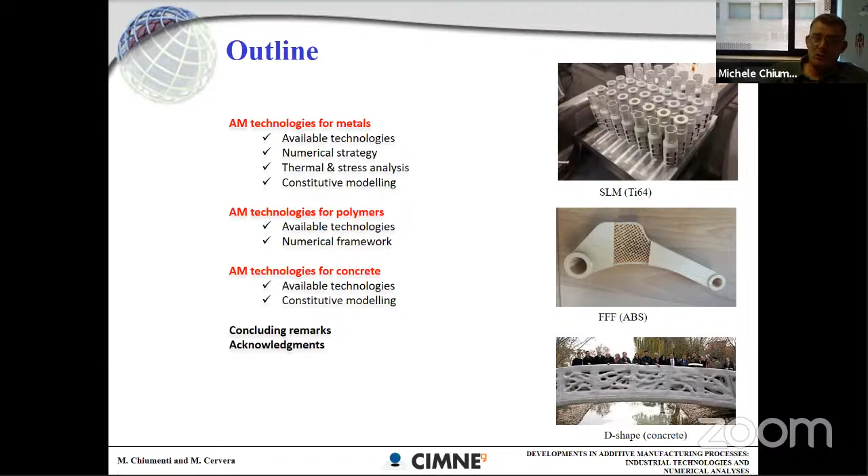I will show you the similarity of this technology in these three different fields. Even if the materials are obviously completely different, the industrial technology resembles somehow, and this is why we can use the same platform for the three of them, but there are some differences that I will show you. So I will start with metallic alloy, then I will show you our work referring to polymers, in particular ABS, and finally what we are starting to do on concrete additive manufacturing.

So the first idea, which I think is extremely important to understand, is that we are working on numerical methods, and numerical methods have some kind of limitation, and this limitation reflects the actual technology in additive manufacturing.

In additive manufacturing, if we refer to metals, there are three driving technologies. The first one is wire feeding, which typically works with very slow scanning speed, millimeters per second, and large thickness of each layer, let's say more than 1 millimeter. Right now we are working with an aluminum component, and the thickness of layer is up to 4 millimeters. So quite large thickness and very slow deposition, with a lot of power needed for this kind of technology, meaning very much coupled thermomechanical coupling.

In the middle, you can find blown powder processes. In this case, you have a heat source through laser or electron beam, and the melt pool formed by this power source is filled by powder, which is blown inside the melt pool. In this case, we are talking about layer thickness of about 200 to 300 microns, so one order of magnitude less than the wire, and the speed is ranging around 10 millimeters.

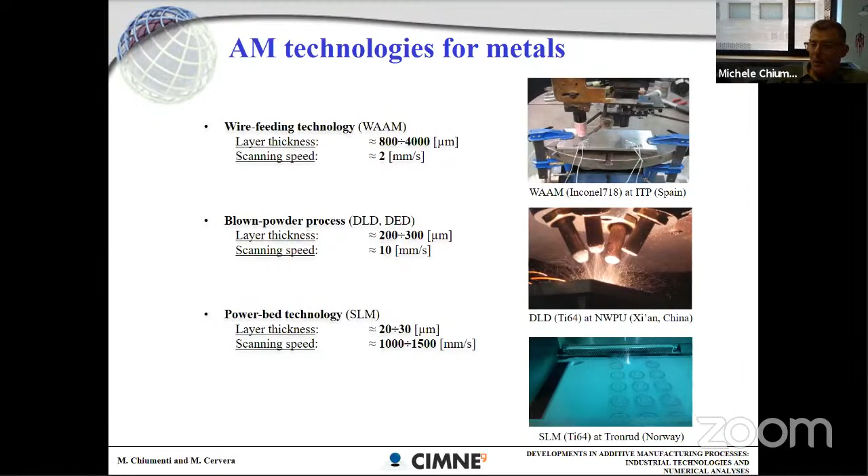Thermomechanical framework. So the thickness is completely different, it's much more localized, the power is much less, and the penetration is much less. And another important thing is that in a powder bed, you have a recoating time, which uncouples more and more the simulation.

So given this, in our opinion, the best and probably most reasonable and suitable numerical strategy for additive manufacturing is when you are able to perform a highly accurate solution of both the temperature and the stress field. This means that you want to reproduce exactly, or as exactly as possible, the actual industrial process. So you want to move the heat source, follow exactly the same scanning sequence, and wait for the same delay time as in the actual process. At the end of the day, you end up with a fully coupled thermomechanical simulation, and I will show you the numerical solution for that.

On the other extreme, you have powder bed. In powder bed, nowadays it is almost impossible to think about high fidelity simulation, meaning it is extremely difficult to follow the exact scanning sequence of the machine, because the size of the layer, the thickness of the layer, and even the size of the melt pool is completely different, two orders of magnitude compared to wire feeding. At the end of the day, the simulation time would be impossible to manage.

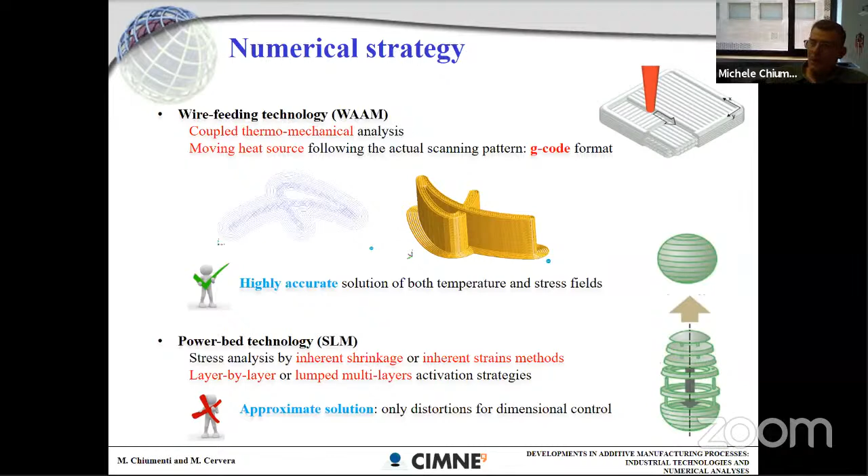So why high fidelity? We think that high fidelity is extremely necessary because if you don't have a solution in high fidelity, at the end of the day you are just generating cartoons. Beautiful colors, wonderful for publication, but much less interesting from the industrial point of view.

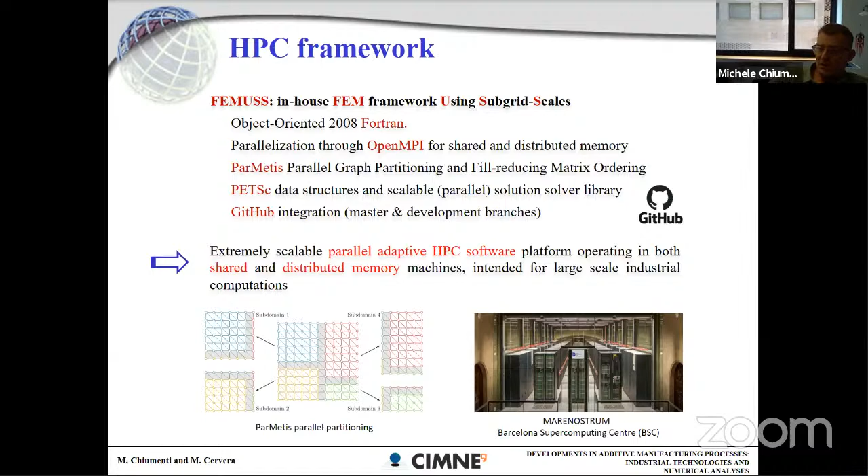We are using ParMetis for the graph partitioning, meaning for the subdomain division. We are using PETSc as a solver library, and we have GitHub integration to allow the work of a larger team compared to what we had in Comet. So this is a very powerful platform, and we are actually running in very large machines. For instance, here in Barcelona, we have the BSC supercomputing center, where we can run the simulation on thousands of processors, typically a large machine in distributed memory.

Next, typically, as for many other industrial processes, the geometry is the bottleneck, and the meshing of this geometry is a nightmare. Apart from this, if you want to go into a high fidelity mode, you really need to follow exactly the scanning sequence, and this also means that you want to mesh according to the scanning sequence. So you want the definition of the mesh according to what the machine is doing, with your melt pool moving along the scanning sequence.

So to do this, what we did is integrate our solver to be able to read the same input data as the machine does. And this means our solver is able to read G-code. This G-code, for instance, can be generated through Cura, which is an open source tool able to generate G-code.

Typically, the machine adds to the original G-code, which is just a geometrical representation of the hatching, as you can see here in the lower part of this file I put as an example. But in this file, you also have added information according to the processing parameters of the machine. For instance, you have information about the power source, the feeding rate, the hatching, and the cooling time. So everything is inside this file.

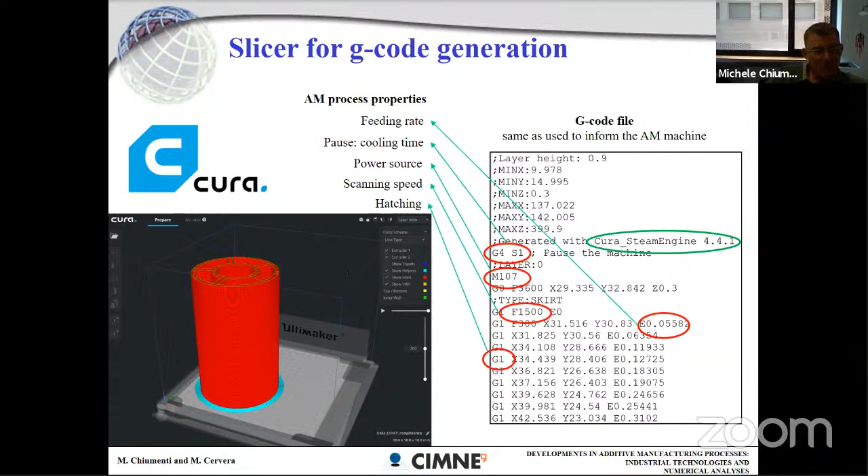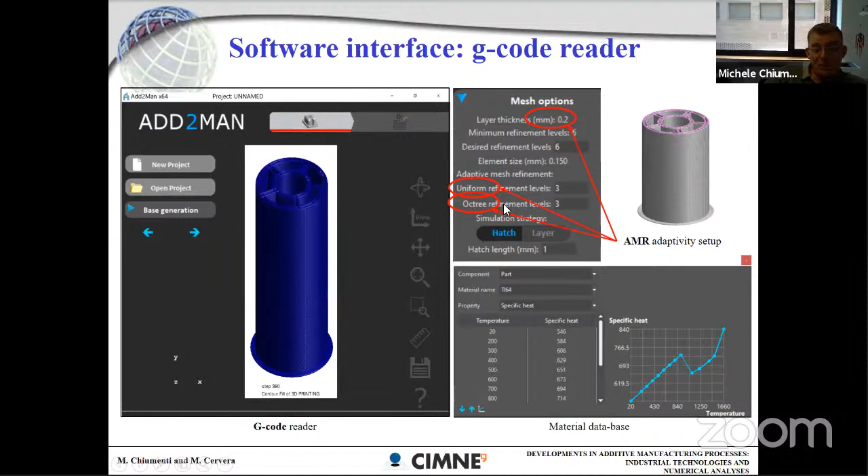And it is the same file which is used to inform the machine, exactly the same. So this means that in our interface right now, we are able to import the G-code file as a representation of the scanning sequence. So you do not generate any mesh—the user is not asked to generate any mesh. The only thing the user does is modify or define the corresponding material database, typically temperature-dependent, and define the number of uniform refinement levels and octree refinement levels to approximate this geometry. And I will show you right now.

We do not have any mesh at the beginning of the process. We just have the part represented through lines coming from the G-code. So the first step is to define the so-called bounding box—you just have one finite element, which is the bounding box of the component. Next step is to define a number; typically we are using about 3 uniform refinements, and this generates a uniform Cartesian mesh of the component.

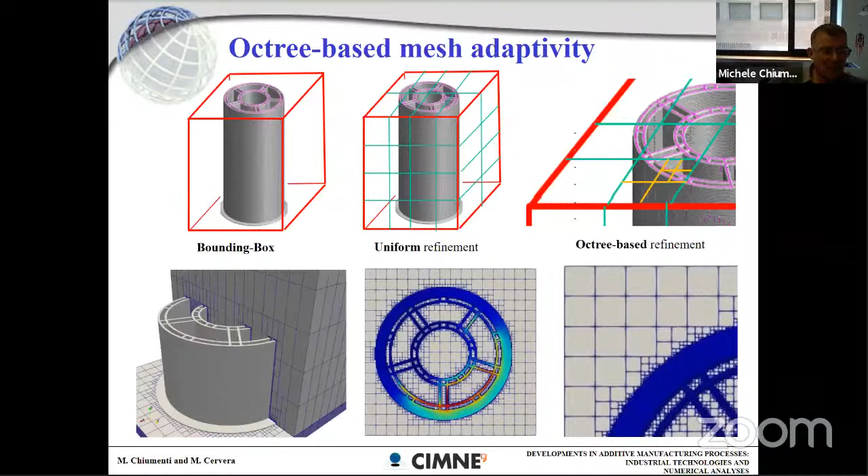Next, there is a following step in which you have the so-called octree-based refinement. The octree refinement just splits one element into 8 elements, in different steps. So at the end of the day, in the lower row here, you can see how you have a very large element where the mesh is not needed, and a very fine mesh where you really need to represent your component, exactly following the scanning sequence of the machine. Obviously, all the elements outside the zone where there is no material are not used, are not assembled, are not computed—nothing. They are just there but completely out of the solution scheme.

Next, reading the G-code, we are able to define a bounding box for each part of the hatch defining the G-code. This is typically a bounding box like this, which takes into account the layer thickness and the width of the spot size, and we intersect this volume with the surrounding mesh. This process is done in parallel, so each processor performs exactly the same operation, defining which elements are to be activated.

And if the background mesh is too large to represent this bounding box, the mesh can be further refined until we are sure we have a good representation of the mesh for this kind of bounding box. So here in the second row, you can see how the mesh is generated and how the adaptive mesh refinement takes place. In particular, you have refinement in the heat affected zone, and then a coarsening operation elsewhere.

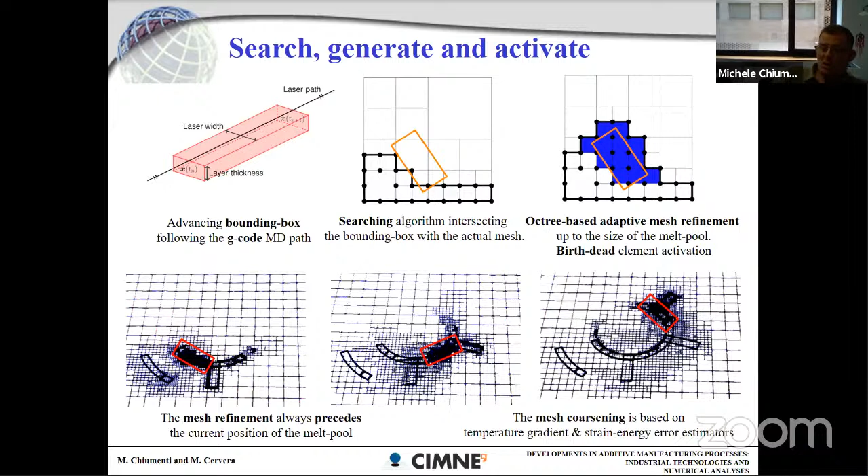So at the end of the day, this is the kind of simulation that we can do. As you can see, you have a mesh which is progressively built according to the scanning sequence, and at the same time you have the solution of the problem. Here I'm just representing the active elements—all the other elements are not active, not computed, and not visualized in this process. For the part that I showed you just before, we are using 4 levels of uniform refinement and 4 levels of octree refinement.

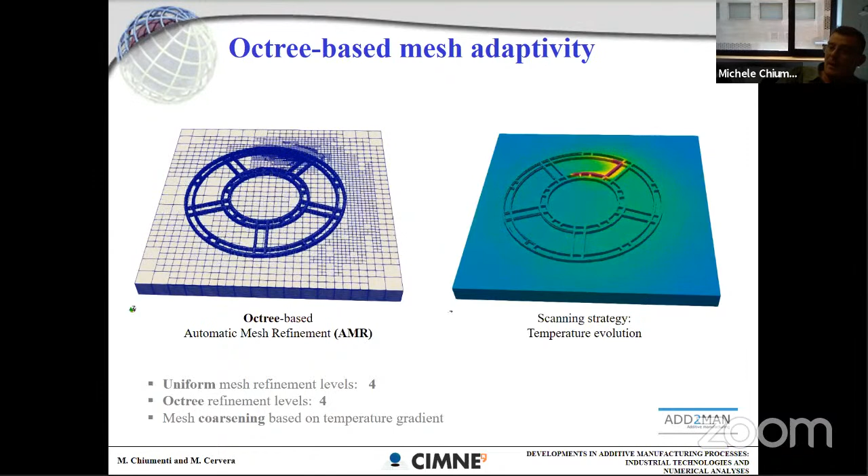Next, I will skip most of the detail of the thermomechanical formulation because you can find these details in our publication. And apart from this, we are just enhancing our background formulation every day.

But I just want to insist on a couple of things. First, if you are working at the level of a single track, it is interesting to define the laser beam input as a Goldak distribution, meaning a double ellipsoid power source. We have this facility in the software, and this is worth it if your time step is small enough compared to the size of the spot. This can be done, and we have very nice results.

In fact, this is a specific kind of framework where we typically look at the microstructure, what is going on at the melting pool level. But if we are talking about component scale, you are not moving along the scanning sequence using such a small time step. You are typically moving from this position to this position, and this means that at the end of the day, in the time step, you are applying the power in a much larger domain. This means you are integrating the double ellipsoid through the time steps — let's say it is an averaging. But still high fidelity, meaning you are still moving very slow compared to the size of the arc.

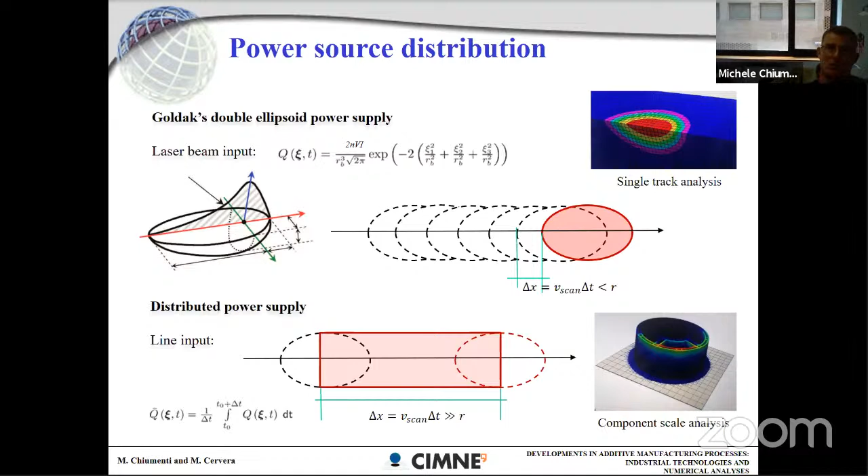Next observation, constitutive modeling. We are working on a more accurate constitutive model at the moment, but just to clarify, all the material properties are temperature dependent. This is a key point, and particularly it's important to consider the yield stress as a thermally dependent parameter.

Something that was, at least for me, new, is that our model behaves differently when the material can be assumed as solid versus when it is assumed as mushy or liquid. Typically, when the material is solid, we have a viscoelastic, viscoplastic model. This means you have elasticity — here you can see the elasticity term and the viscosity term. But what is more important, you have a viscoplastic behavior, so you have this damper in parallel with the plasticity.

What happens is that when you switch to the mushy or liquid phase, you want to represent your material as a liquid, as a viscous liquid. Typically what you want is to represent it through a purely Norton-Hoff model. So on the volumetric side, you have just thermal deformation, but on the deviatoric part, the stresses are represented just by a damper. Typically it is a non-linear Norton-Hoff, which behaves as a rigid viscoplastic material.

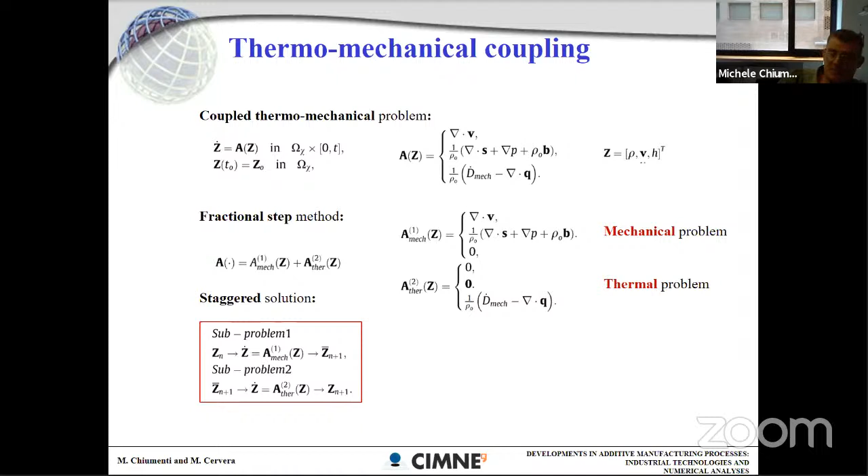Finally, we are working on the finite element technology, and just this week I saw the first very interesting results. First point: if you use just a standard displacement-based formulation, the element is inaccurate and unable to deal with isochoric constraints. This is important — being able to play with incompressibility is extremely important in additive manufacturing.

Why? First, because when you are liquid, all the deformations are purely deviatoric deformation, so isochoric deformation. But also when you are solid, all the plastic deformation comes from a J2 plastic model, so also in this case they are isochoric deformations. So it is extremely important to consider an element able to deal with the isochoric constraint.

The classical solution for that is a displacement pressure or velocity pressure element. We have this element fully understood and implemented in different situations, both for solid and liquid analysis. Typically, we use orthogonal subgrid scale stabilization to play with a linear field for pressure and velocity or displacement.

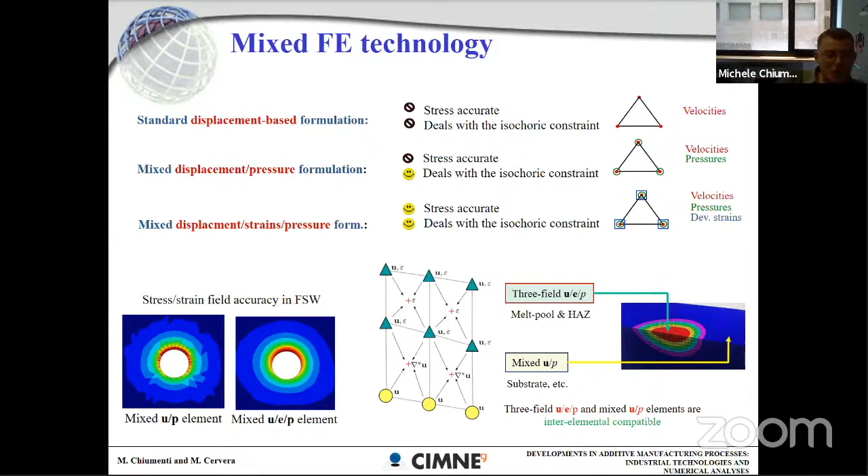At the moment, our solver allows us to use both formulations at the same time. The idea is to fix all the degrees of freedom of the deviatoric strains when they are not necessary. So at the end of the day, we have an octree-based finite element refinement for the H refinement, and for the P refinement—well, not exactly P, but a formulation refinement—through this three-field formulation.

Now I will show you something about additive manufacturing for polymers.

In this case, the first thing to understand is that the main objective is not processing, it's performance. So we are not going to simulate the processing, the building of the part, but what is of interest is the performance of this component.

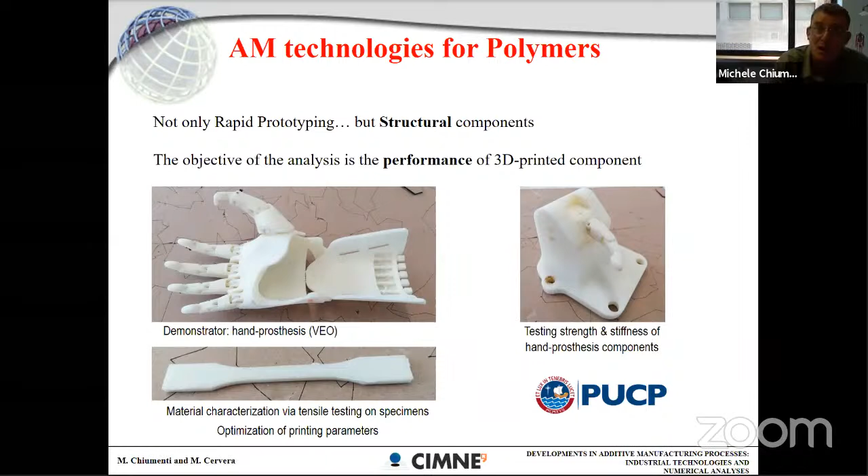And why? Because typically these components are made by filament, FFF, fused filament fabrication, and so the material behavior is not isotropic at all.

Here you can see, once again, the different technologies in the market. On one side, you have fused filament fabrication, which is our objective at the moment, typically from Stratasys, Ultimaker, BCN3D—large companies working on that.

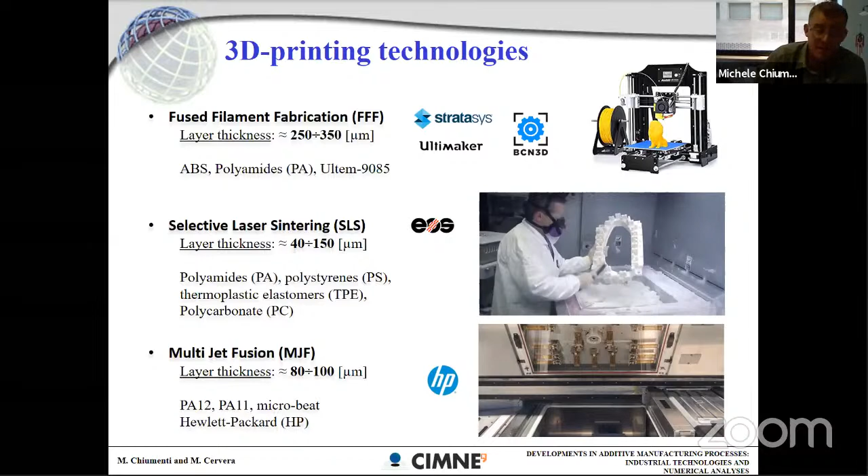This builds the part through filament, but there is also SLS, which in this case is powder bed, as with metal. The third possibility is multi-jet fusion: a selective sintering of the material using infrared light.

Now, how do we work? What is our strategy in this case? Once again, we use G-code. The G-code represents exactly the scanning sequence, well, the deposition sequence, to deposit the filaments.

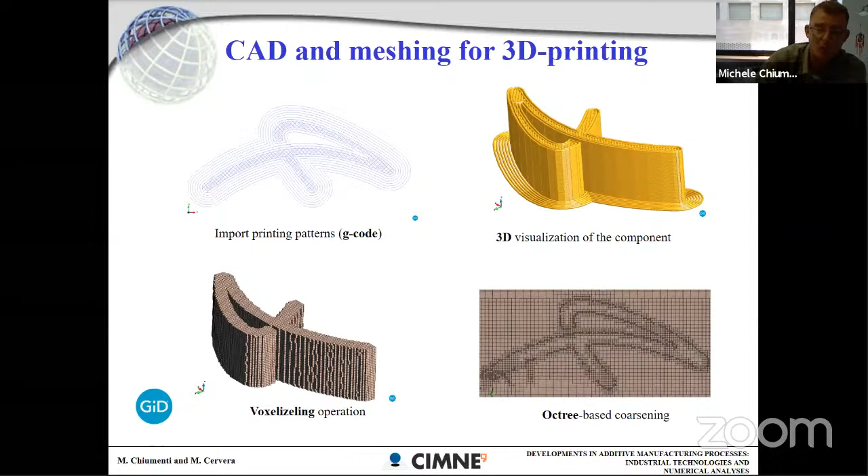Once we have this, we go through a voxelization of the full component, and after the voxelization, we go through an octree-based coarsening. At the end of the day, we have a mesh very well optimized, where you have elements where necessary, and everywhere else uses a very coarse mesh.

Next, we need to define the material data for each zone of the component. As you can see in these figures, during the printing process, typically you have three kinds of printing setup.

The first one is on the skin—typically aligned filaments, completely aligned, which follow the boundary of the component. Then you have what we call covers, typically the bottom and top covers, which use crossed filament: 100% infill with 45° and minus 45° crossing.

And finally, you have the infill. This can be just infill like the one you can see here, or it can be done through a lattice structure.

So once again, you don't want to simulate this lattice structure as it is, micro modeling, but you want to do some homogenization. So at the end of the day, you need to characterize external contour, covers, and infill structure.

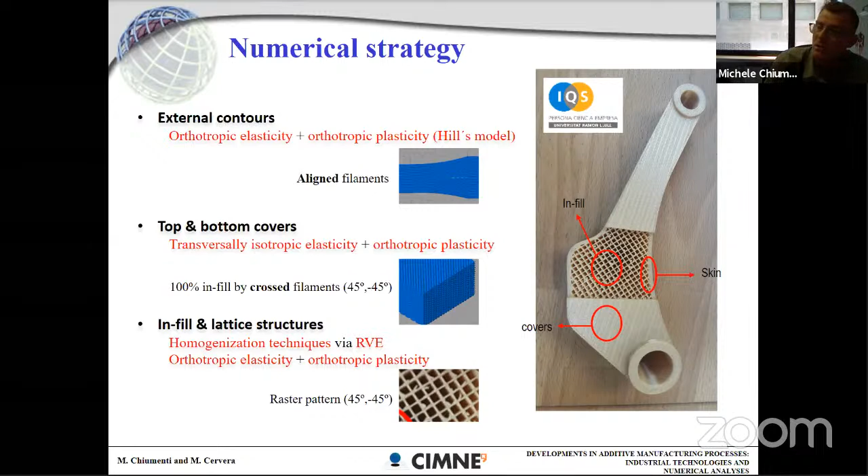To do this, we have been involved in different local Spanish projects where we had the possibility to characterize the materials. At the end of the day, we generate specimens with aligned filament as the one on the top, and cross filament, 100% infill, 45 minus 45, and using different printing orientations, we were able to characterize the constitutive tensor.

Observe that typically what you obtain at the end of this work is a fully orthotropic tensor of the material. You can simplify a bit without loss of accuracy as a transversal isotropic material, but still not isotropic.

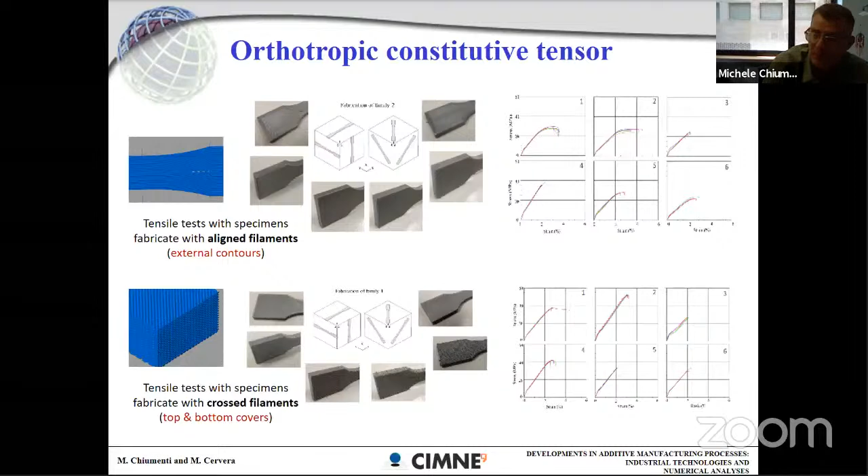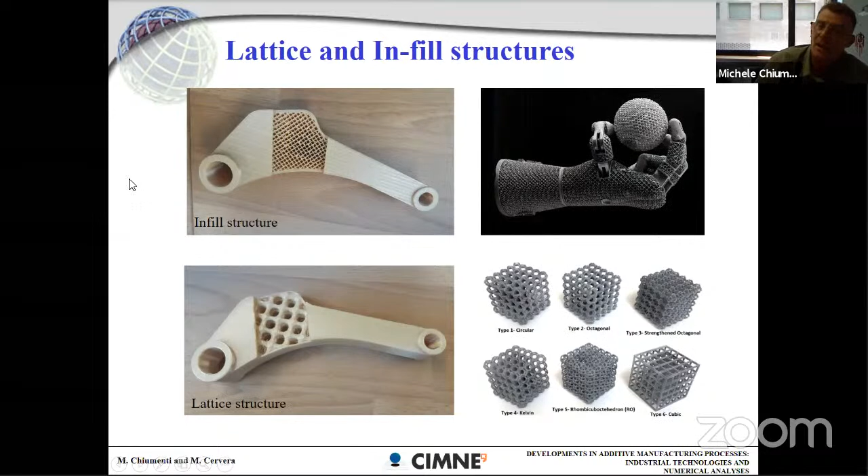Next step is to define the behavior of the lattice structure. In this case, you have lattice structure or infill structure. At the moment, we were working with infill structure, so typically 45, minus 45 rasters. So what's the solution? The solution is to go from the actual lattice structure to one homogenization of this lattice structure.

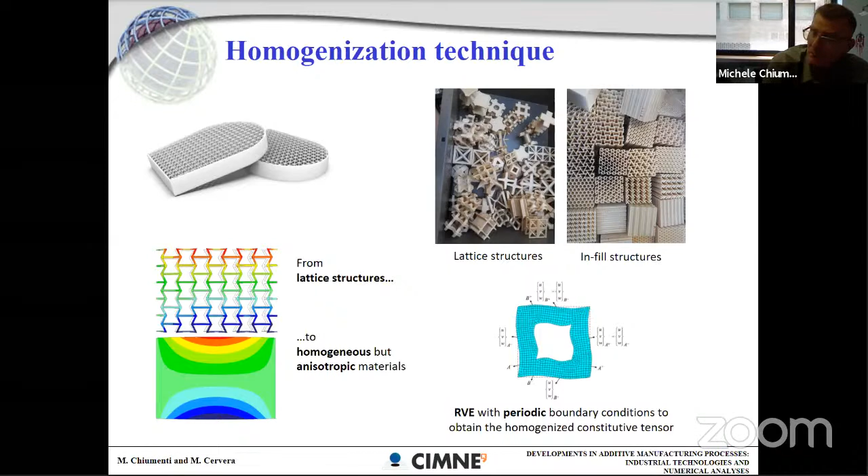And the result is once again an anisotropic constitutive tensor. So here we are using periodic boundary conditions, and we are obtaining the constitutive tensor for this material.

Once you have the homogenization of the lattice structure and you have the material characterization of the contour, we went through different demonstrators to validate our software. So I just show you one of them that we did with the help of Eurecat. This is a door handle demonstrator, and it is being printed in 3 different orientations and loaded. Observe that this is a quite difficult test, in fact, because it includes both bending and torsion tests.

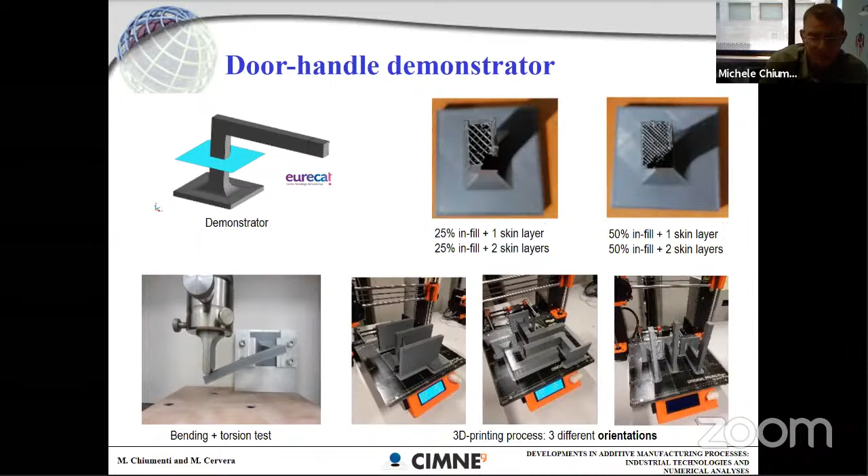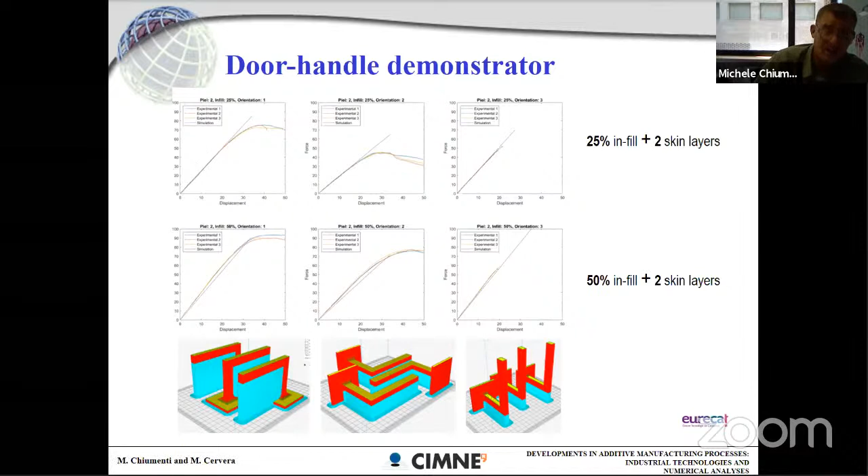Well, this is the result once terminated the sensitivity analysis. We did the work using 25% infill and 2 skin layers, and the second kind of specimen were built using 50% infill and also 2 skin layers. In the paper, you can find other combinations. But at the end of the day, the result is that the model is able to predict the stiffness of this material in all the different orientations.

Finally, I would like to conclude my talk with some recent approaches to additive manufacturing from concrete. This is very young, and we probably enter into this world by the beginning of September. In additive manufacturing for concrete, there are also 2 kinds of technology, very similar, once again, to the ones in metallic alloy or plastic.

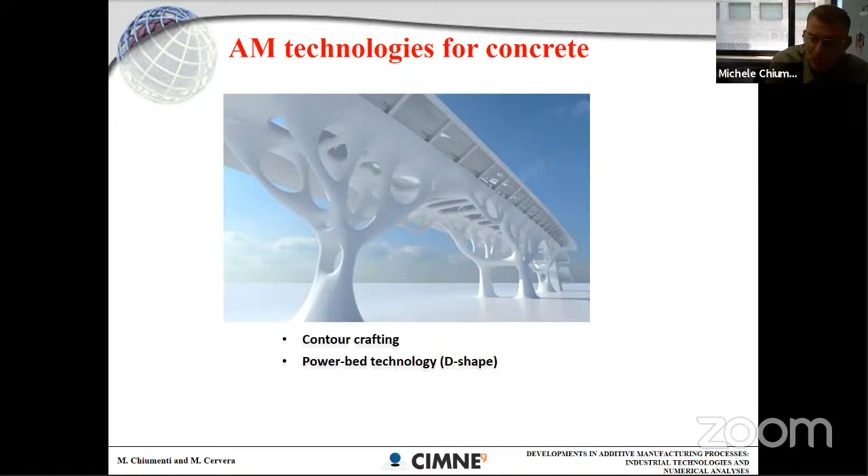One is contour crafting, and the other one is powder bed technology, what is called D-shape. The contour crafting is very similar to what we used in wire feeding. In this case, you have an extruder, which is extruding the material according to a specific deposition sequence. So you have a robotic arm able to generate different layers of material according to a specific sequence. And they have exactly the same problem as for metallic alloy. When depositing, the timing for this deposition matters. In case of metallic alloy, the problem was temperature; here, the problem is the hardening of the lower layers.

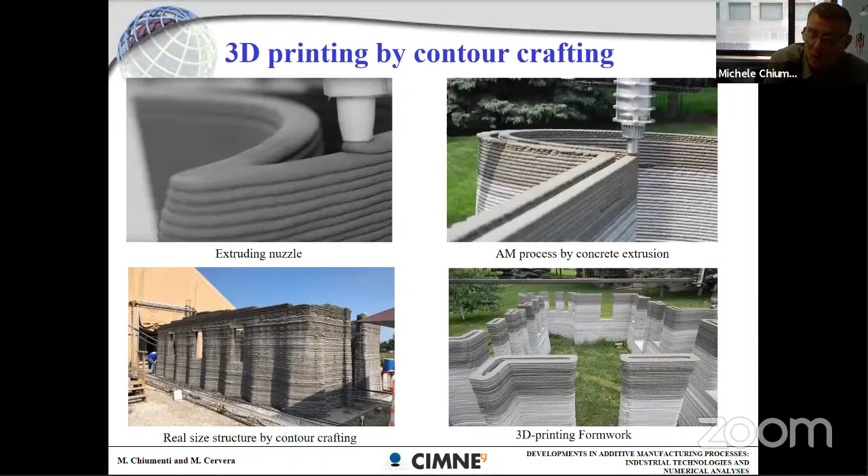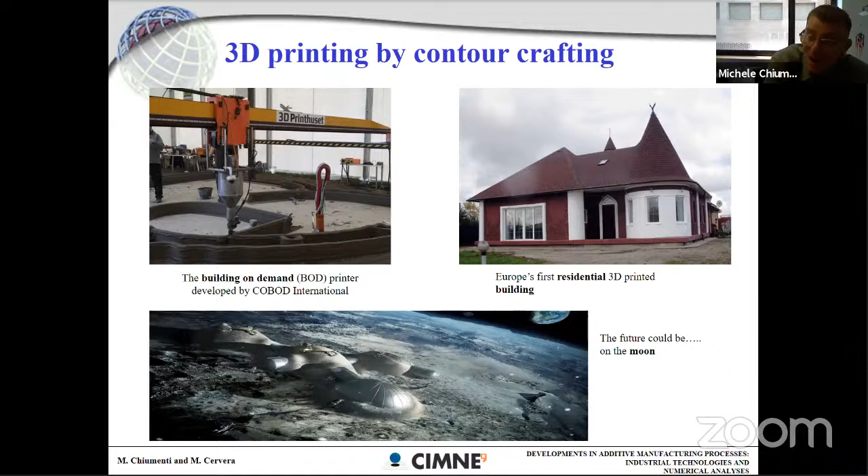In this case, you are selectively wetting the powder, the concrete, and they are using one kind of binder. Once the material solidifies in a layer by layer manner, at the end of the process they remove the loose powder, and you can obtain the final structure. So it is quite a different technology from the previous one, and the numerical tool should follow a different criteria.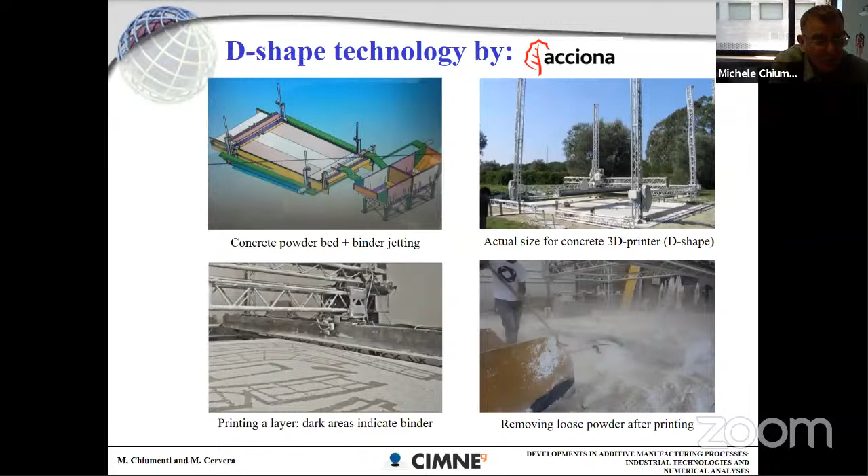Note that at Acciona they have a machine which is, let's say, 5 meters by 2, but in the Arabic countries, they are using a machine the size of a tennis court, so quite a big machine.

The result are structures like this, and for instance the first one on top is a bridge that you can find in Madrid. You can print different structures with very complex geometries, and the future can also be sculpture or architectural applications. So very nice and very complex structures.

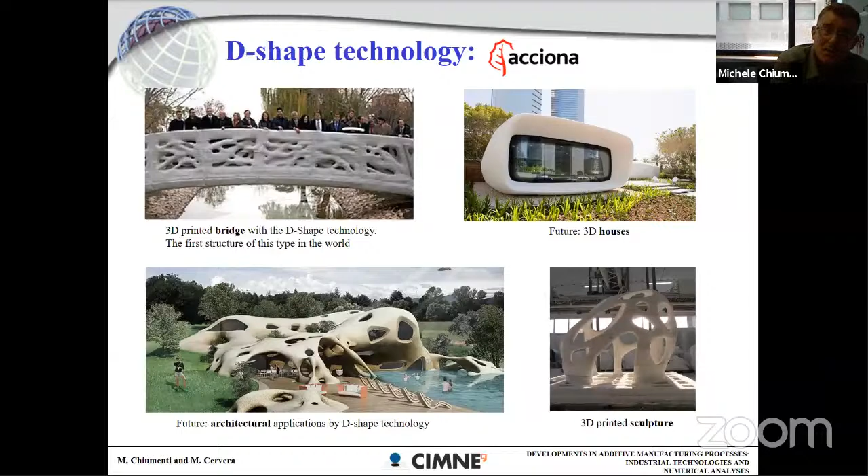So you can have the same facility that you can find in metals obtained through concrete printing. Now, for constitutive modeling, we have previous expertise and experience in the aging behavior of concrete because we used this kind of constitutive modeling for dam construction.

The model is more complex, meaning you have to couple not only the thermal problem but also the chemical problem. You want to account for hydration, aging, and you can have problems of cracking and creep. So not only thermal deformation, but also the effect of water content.

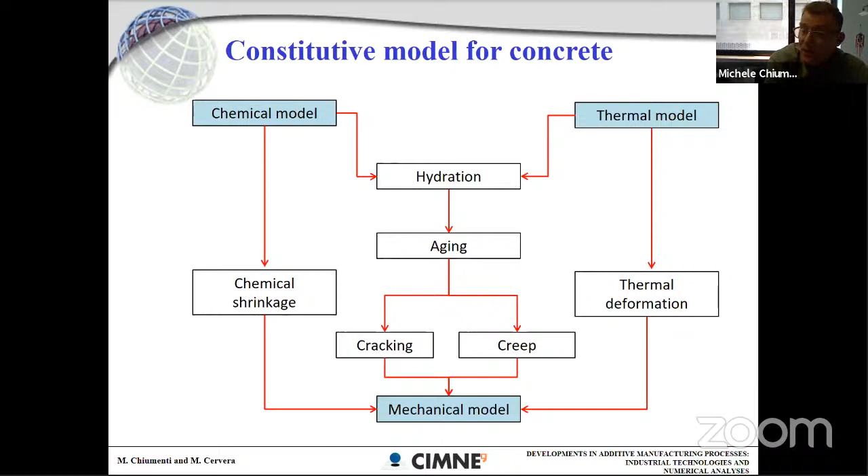At the end of the day, the model we typically used at that time was a viscoelastic damage model. Most of the work is done on the viscoelastic behavior of the material. Typically we use a chain of dampers and stiffeners, and you have an aging yield surface.

What you typically need from the experiment are curves like this one, showing how the strength increases with time and how the stiffness increases with time. This is the main input for the software. So instead of a temperature dependency, you have a time dependency according to the aging of the material.

At the end of the day, we would like to use exactly the same structure that we have for the metallic alloy framework, which is also used to generate the mesh for polymer material, and also for concrete-based additive manufacturing. So we can once again follow the deposition sequence of the concrete and just plug in a new rheological model for this kind of material.

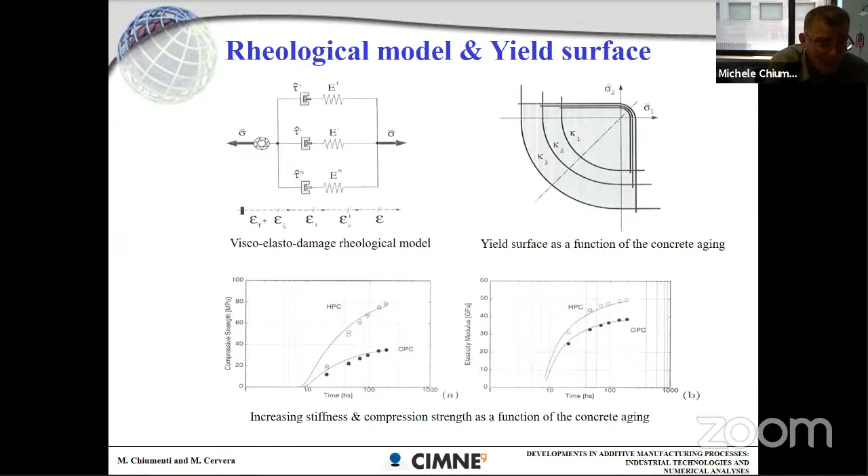These materials are not just usual concrete for civil engineering construction. At the moment we are in touch with Acciona, Aramco, and other companies, where the objective is to use even 30% polymer material in the mixture of this concrete paste. So it is really a new material that must be studied.

In conclusion, we are very much interested in defining a framework for the numerical simulation of additive manufacturing. The material itself is not the key point - the objective right now is to have a good platform for all materials, and then each specific application will use its own constitutive rheological model.

We still think high fidelity is fundamental. We do not want to do layer-by-layer activation. We don't want to reduce the model that way, but we would like to be as accurate as possible, meaning following the actual scanning sequence of the machine.

For this reason, we decided to move to G-code-driven geometry. To do high performance simulation, we need a good parallel framework, and we demonstrated weak and strong scalability in our publication. To keep the number of finite elements under control, meaning the requirement of the machine, we have a very powerful octree-based adaptive mesh refinement technology, which keeps the number of elements almost controlled during the full construction.

Depending on the material, we can play with viscoelastic, viscoplastic material, Norton-Hoff in the mushy zone. As I showed before, in the case of concrete, we are using the viscoelastic damage constitutive model.

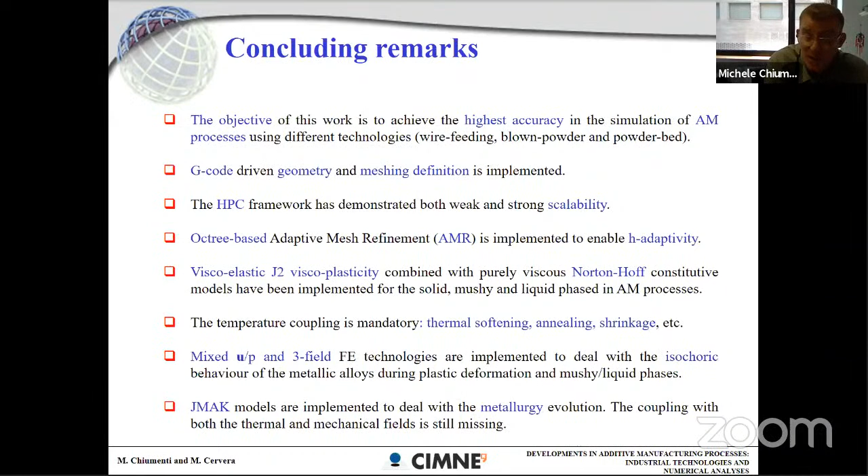Here I also added the metallurgical evolution. I had no time to explain what we did on the metallurgical side, but we are also moving forward in this direction. So I would like to acknowledge some of our partners in some of the projects we had.

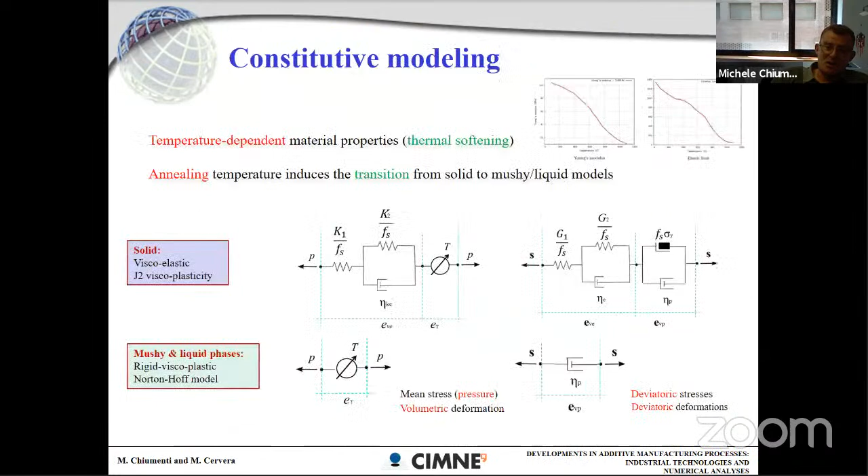But as I said, from our point of view, when we look at the component scale, for us it's just a parameter to be defined. And as you could see in the simulation of the temperature, you can really achieve very high accuracy. So absolutely, if your objective is the melt pool, probably what you said is extremely important and this is key in this kind of simulation. But when you look at the component level, much less.